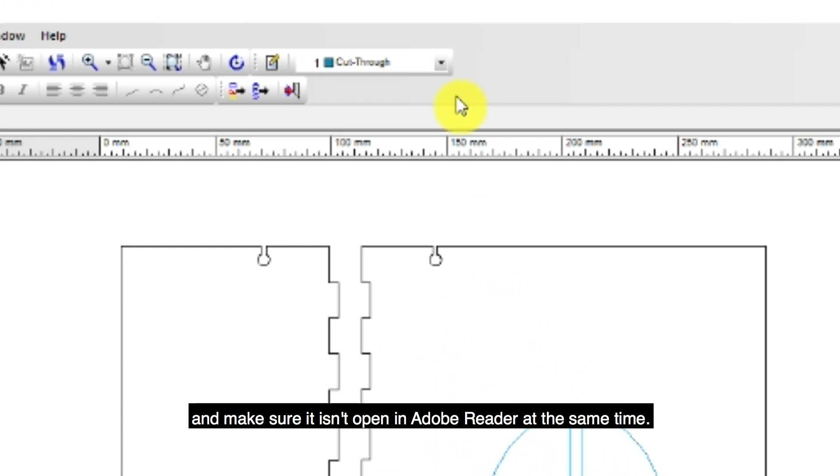The laser has 4 basic styles of cut. Cut through cuts completely through the material. Engrave cuts partially into the material. Kiss cut just burns the surface of the material, and no cut means no laser activity on the line.

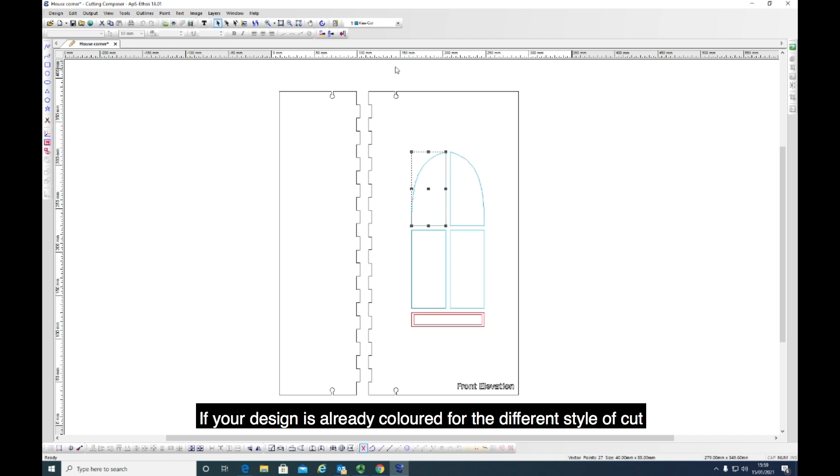By selecting lines in your design, you can assign one of these styles from the drop-down menu in the toolbar. If your design is already colored for the different styles of cut, you will need to check that they correspond correctly. For example, on this file I want the exterior lines to cut through, but when I click on them I see the software has assigned the black lines to unassigned.

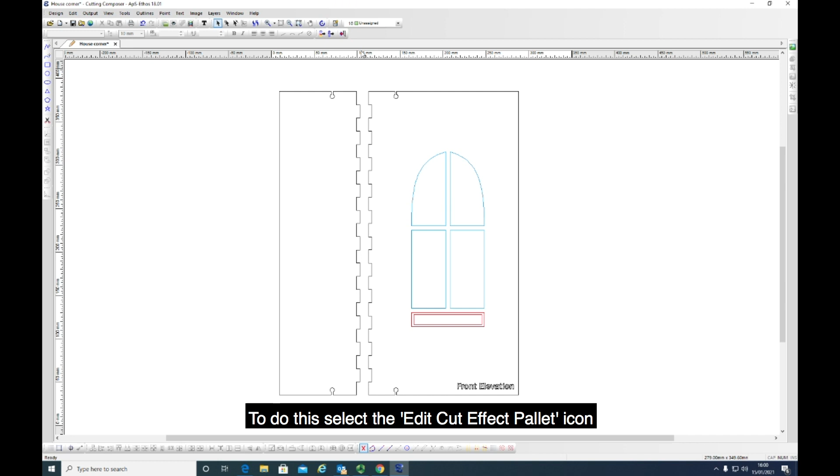I could change them individually, but if I've got lots of them, it's quicker to reassign the color to a different style. To do this, select the Edit Cut Effect palette icon. Choose the effect you want, choose the color you want it to be, then assign.

It's sometimes a good idea to press Remove Unused at this point because it will show you how many colors you are using in your drawing. This is useful to see if you've used any slight differences in color.

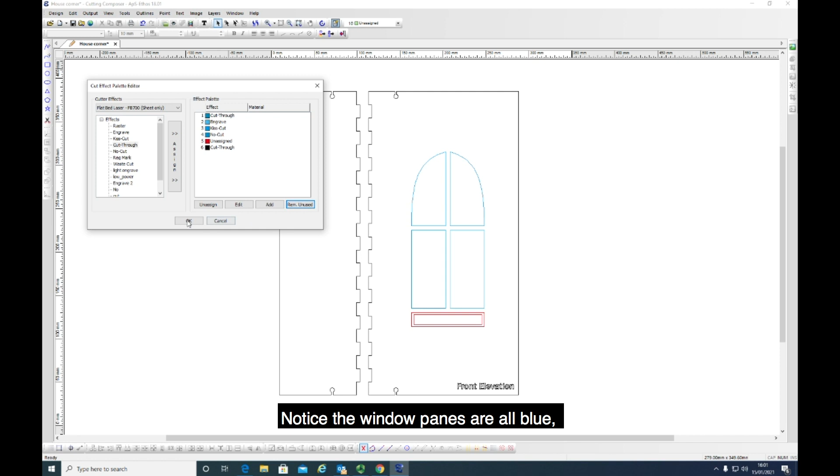Notice the window panes are all blue, but if we click on them, we can see that they are different styles. They have to be exactly the same color, or hex code, to be executed in the same way. In this instance, I select all 4 and assign them to the style I want from the drop-down menu.

If you want to infill lines, there's a process called rastering, which scans a laser over the interior of a closed shape, engraving the fill rather than the outline. I'm going to raster cut this text, but I don't want an outline, so I'm going to choose no cut from the options, but it's not there.

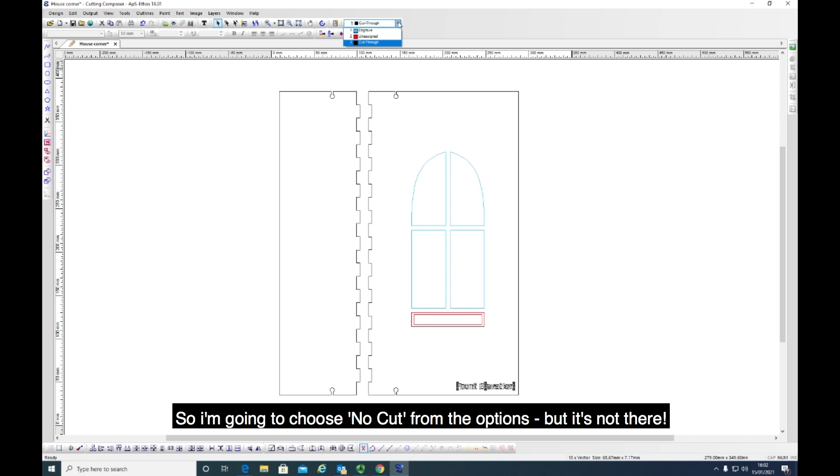I'll reassign the unassigned color to no cut. Then I'll add a new style and assign that to Kiss Cut, which is what I want for the boxes underneath the windows. When you add a new style, you have to choose a color using these sliders as well.

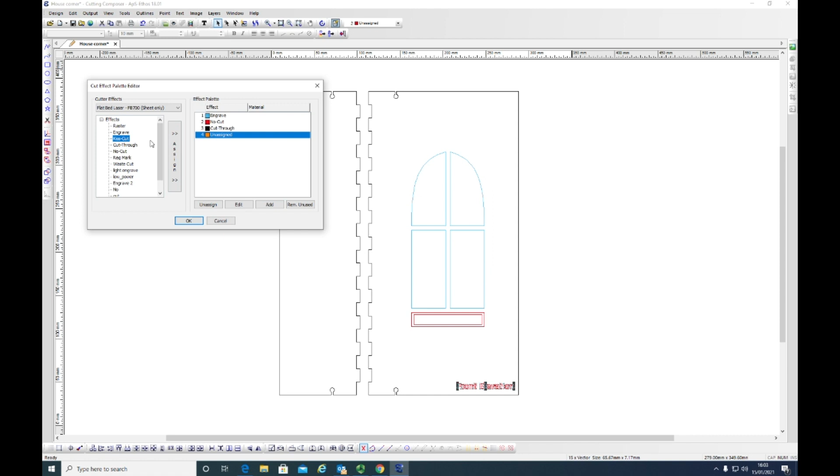As you can see, the text is now no cut, and if I select the boxes, I can then assign them to Kiss Cut.

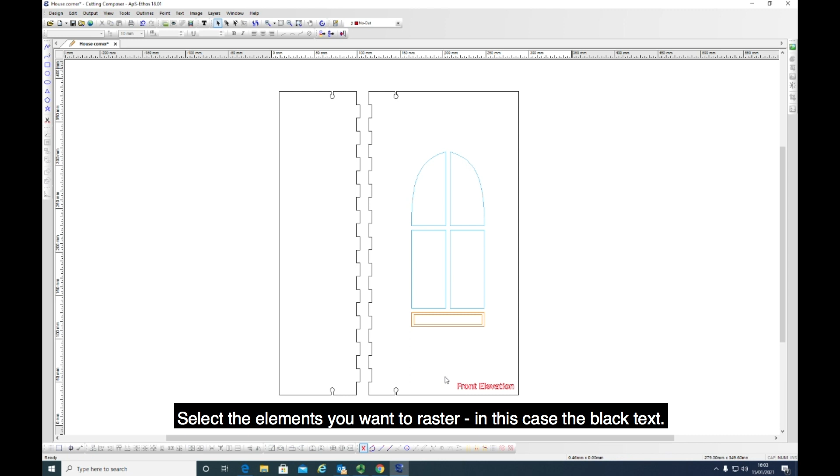Okay, I digressed a bit there, back to rastering. Select the elements you want to raster, in this case the black text. Right click and select Properties.

Select the 3rd tab, Raster Engraving. Check the Enable Engraving box. Click Apply and OK. If you want to alter the depth of the raster engraving, ask a technician.

The software now needs to know what material you are cutting. This is important as all materials have different speed and power settings. If you select an incorrect material, it might not cut your job correctly or could even cause a fire.

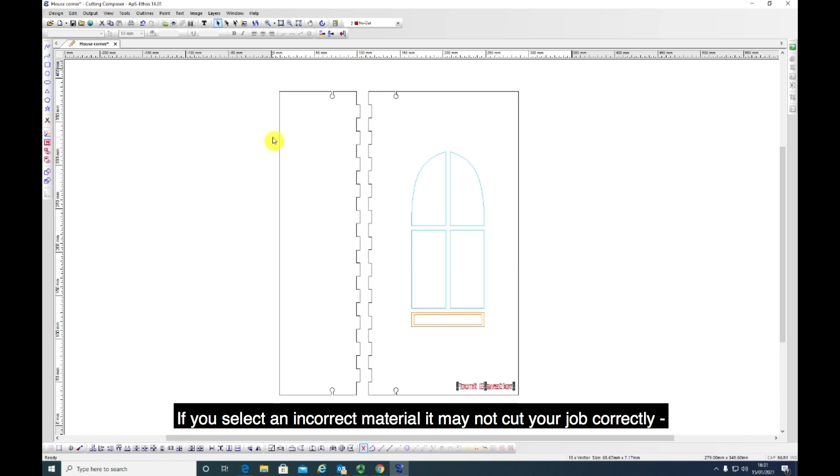To select the material, go to Output, Material Manager, Setup. It will not work unless the machine is on. Drop down the Material menu and select the material you are cutting.

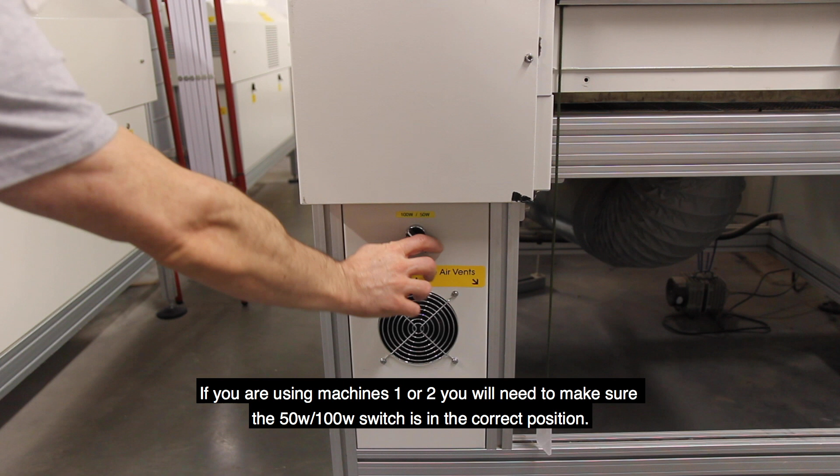If you are using machines 1 or 2, you will need to make sure the 50 watt, 100 watt switch is in the correct position. There should be an indication in the Material menu when 100 watts is required, and click OK.

If you have a large design, it's a good idea to see how long it will take by doing a cutting estimate. Click on Output from the main menu and select Cutting Estimate.

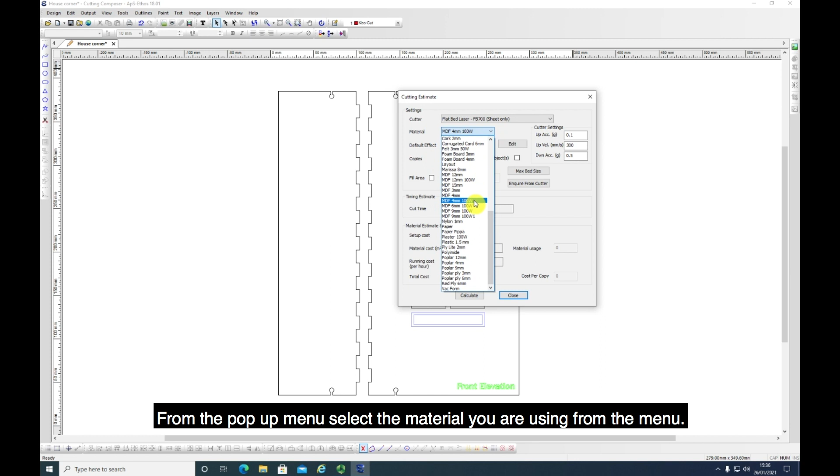From the pop-up window, select the material you are using from the drop-down menu. Click Enquire from Cutter, which checks the size of your material from the media size you have selected on the cutter. Press Calculate and you should see the estimate time in the cut time box.

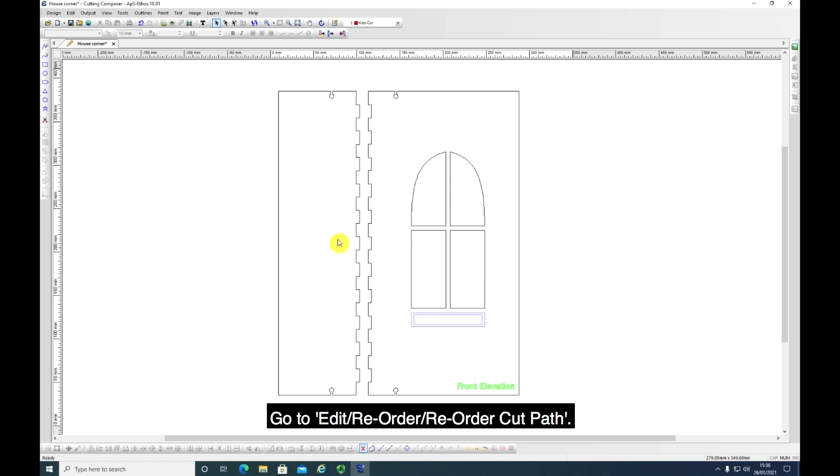If you want to speed up this process, you can use the Reorder command, which organizes the individual cuts of your job more efficiently. Go to Edit, Reorder, and Reorder Cut Path. On large files this might take some time, but you should see the cutting estimate come down as a result. We've reduced it by 30 seconds on this small file.

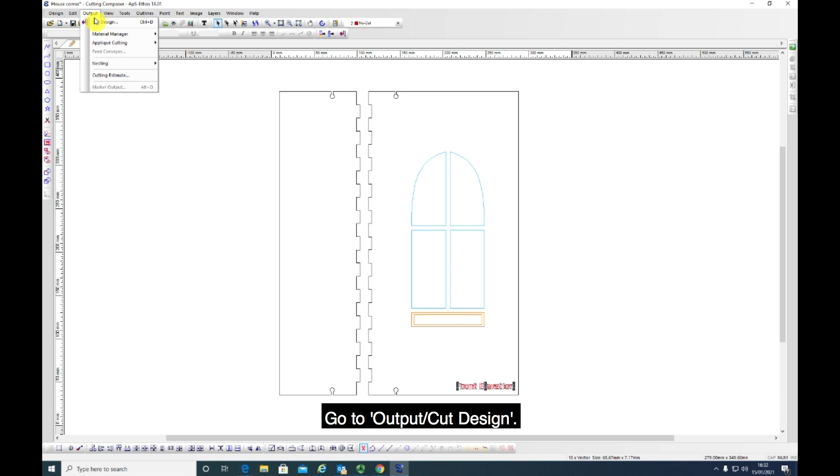You are now ready to send the job to the laser cutter. Go to Output, Cut Design. Before you press Send to Cutter, there's a few things to check on the tabs.

On the Material Manager tab, make sure you have the correct material selected. On the Output tab, it's important to check the rotation box. Unchecked, it doesn't rotate your design. When it is ticked, it rotates your design 90 degrees on your material, and when it's grayed out, it auto rotates for the best fit, although this doesn't work all the time.

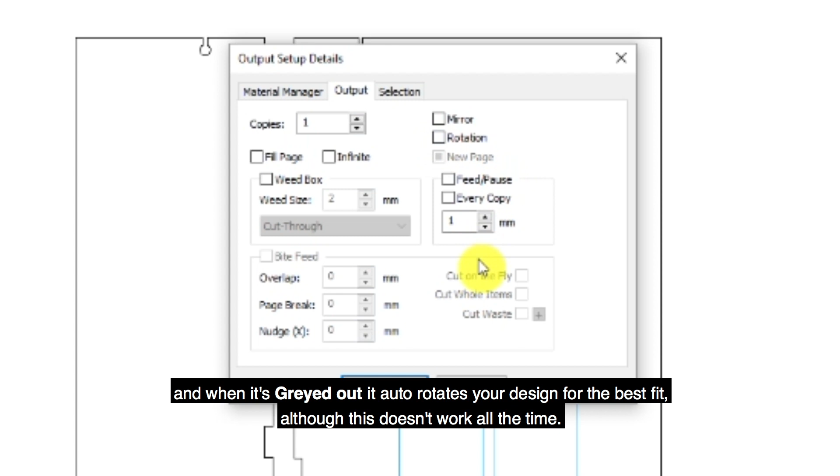On the selection tab, cut needs to be on design. For the nesting option, if you want to use your cut data to align to your origin, and that includes your kiss cuts and engraves, then choose Cuts' Extents. If you want to include your no cut data to align to the origin, then choose Data Extents.

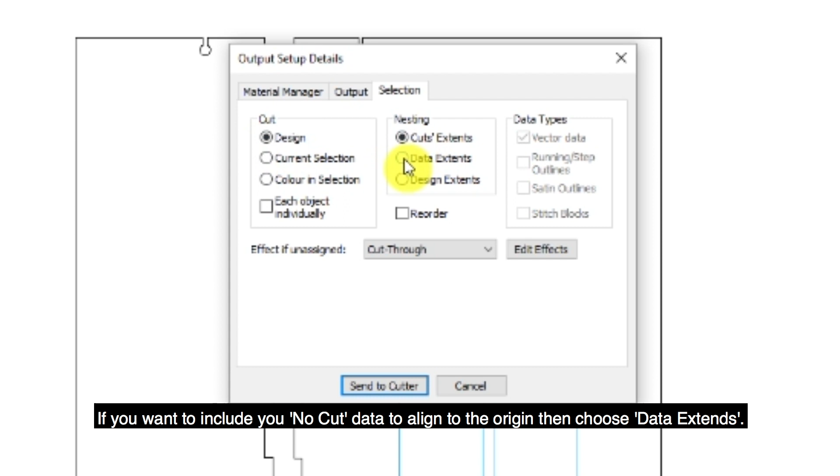Once these options have been set, you can press Send to Cutter. The laser should now start to cut your design.

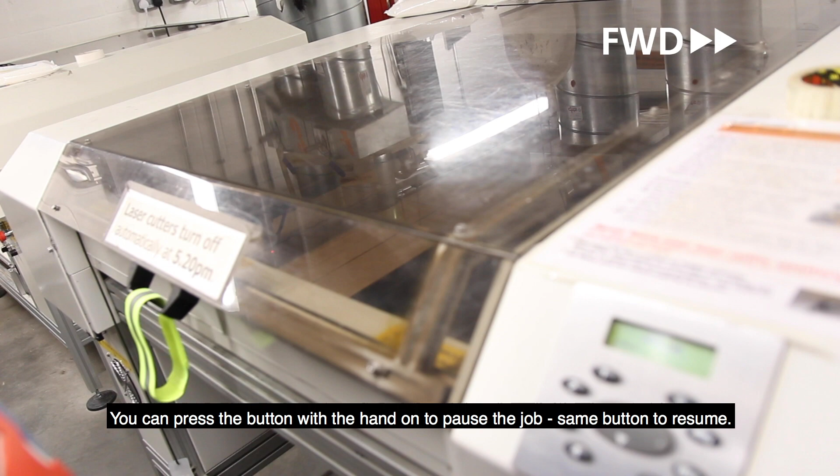Please double check that the extraction is on and never leave your machine cutting on its own. You can press the button with a hand on it if you need to pause the job, and the same button to resume. On the touch screen, just press the pause button.